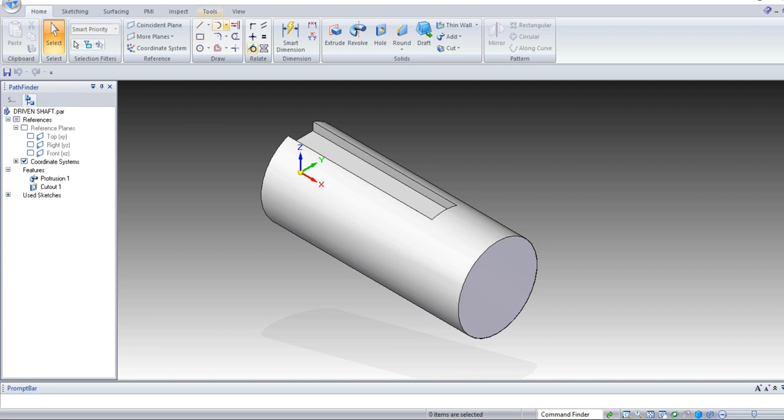Take a new file, part file, select OK, select front plane, select sketch, select front plane, take a line command.

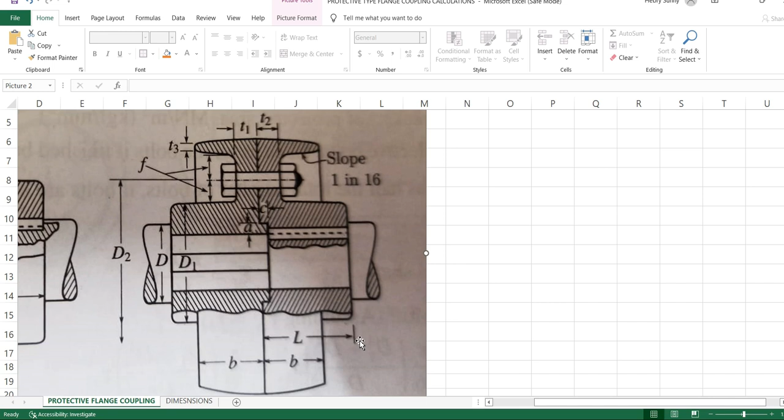From the origin point, draw a horizontal line of length equal to the length of the hub. Length of the hub is 58.4. Enter 58.4. Angle minus 180.

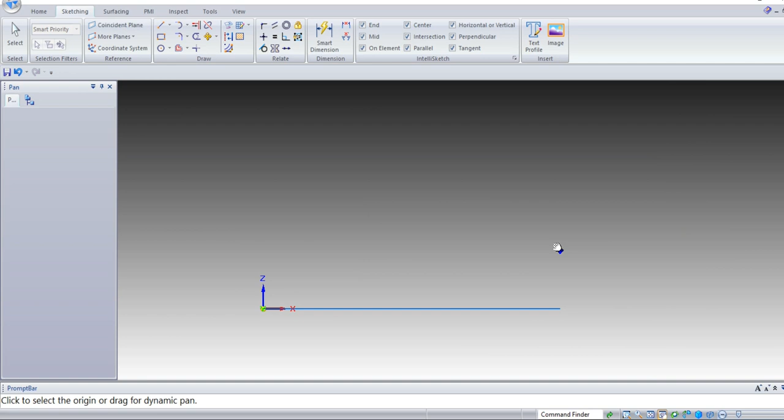Next, draw one vertical line of height d1. d1 is 64, half of which is 32 mm.

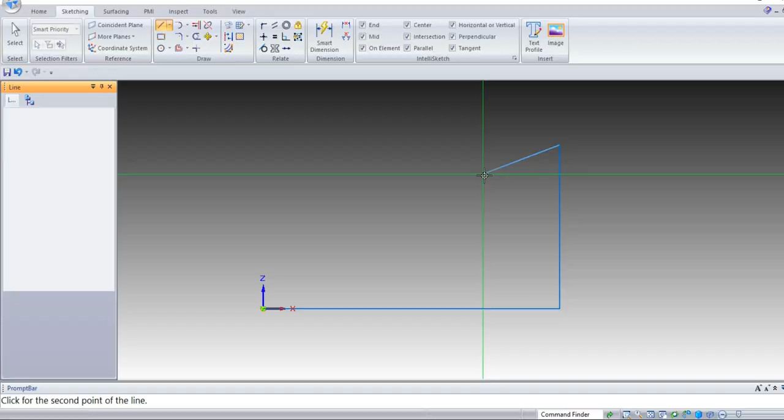Next, vertical line of 58.4 minus 20.2, that is L minus TF. Angle 0. Right click.

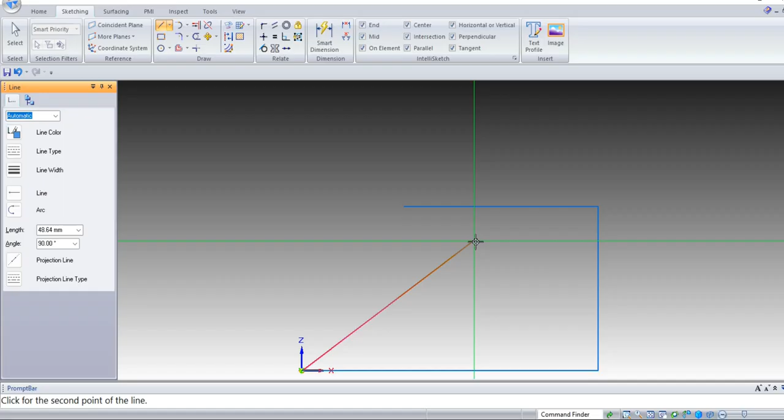Again from the origin point, draw one vertical line of height d3. Total diameter is 128, make it 128 divided by 2. Angle 90.

Next, draw one horizontal line of TF. TF is 20.2. Make it 20.2, angle 180 degrees. Enter. Next, again draw one horizontal line of TP. TP is 8 mm. Enter 8 mm, and again angle 180 degrees.

Draw one vertical line of T3. T3 is 3.2 mm, minus 90 degrees. End the command, right click. Draw one reference line from the origin point.

Vertical line of bolt diameter D2 is 96, so 96 divided by 2 is 48. Horizontal line up to this dotted line. Here you will find the reference dotted line.

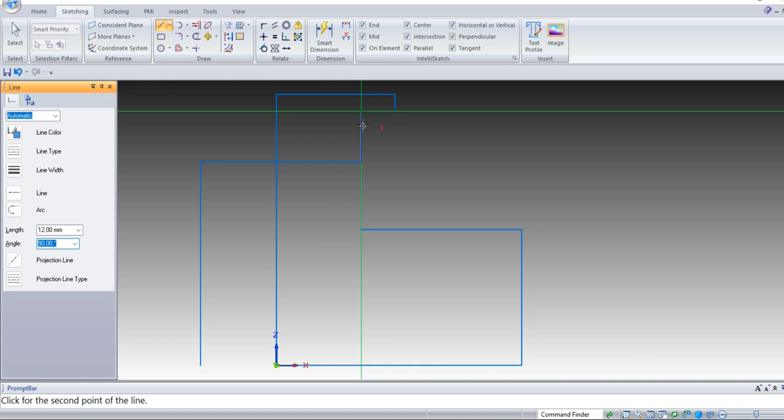Click here, draw vertical line upward. f is 24, exactly half of f is 24 divided by 2, angle 90. Join this line to this 3.2 mm line.

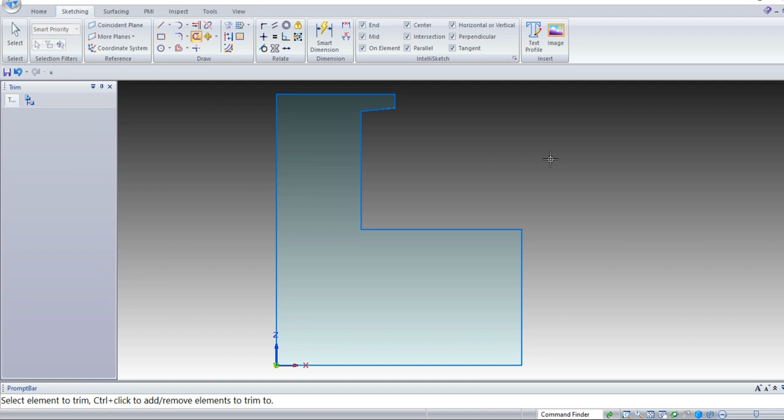Go for extend to next, click this line, extend up to here. Take a trim command, trim this line and this line. Select Control I for isometric view.

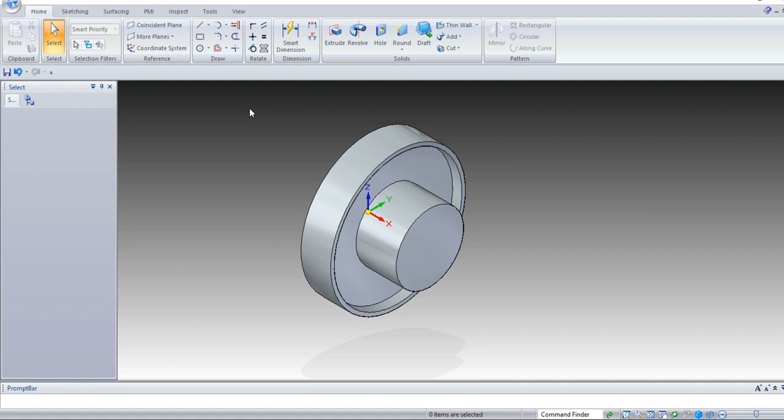Go for revolve command. Click on the sketch, accept. Select this bottom line. Revolve 360 degrees.

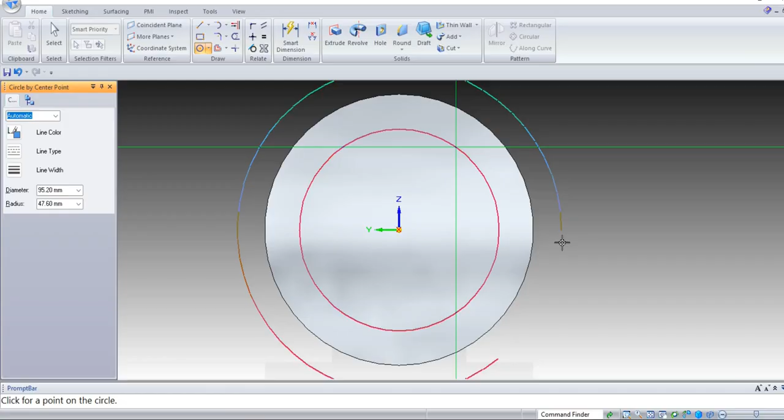Now select this face, left face, take circle, select left face, Control L. From this origin point, draw a circle of diameter - bolt diameter is 96, diameter of the bolt circle is D2. Enter 96. Escape. Again repeat the circle command.

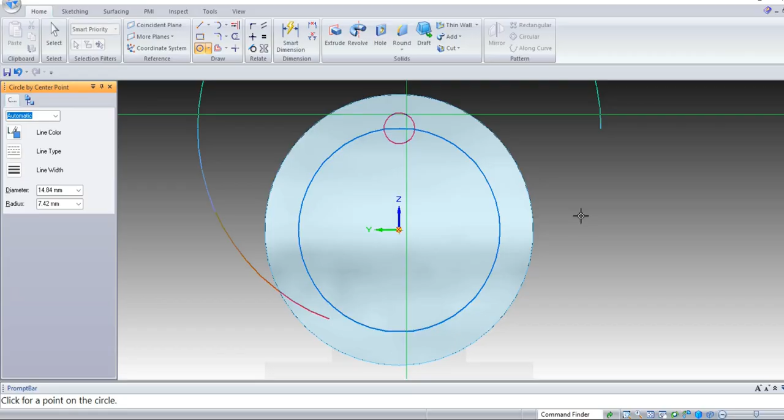From exactly this point, draw one circle of dB, that is 12 mm. Enter 12. Repeat for 4 circles because number of bolts is 4, placed exactly 90 degrees apart. Right click, now escape.

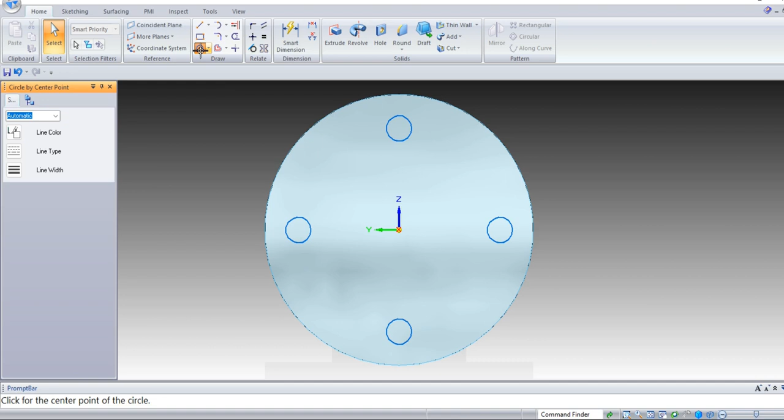Select this circle of 96 mm, which we took for reference purpose, so delete this line. Again select circle, from origin point draw one circle of 32 mm, diameter of the shaft. Enter 32.

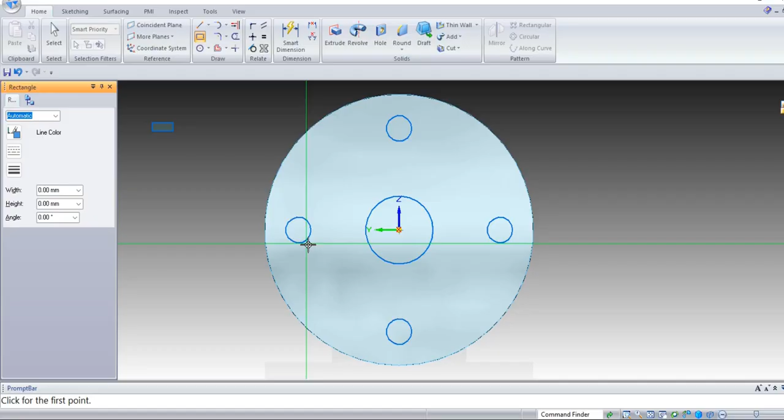Now select rectangle, draw one rectangle of width 10, height 4, angle 0. Here we see width 10, height is 8, half of the height is 4 mm, so we take 4, and length is 10.

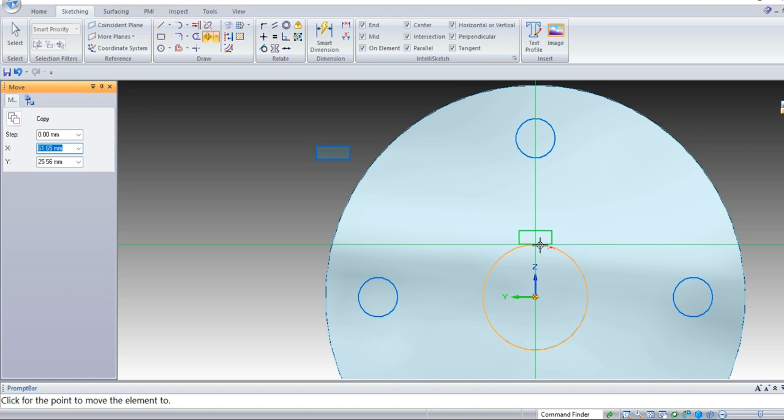Select move command, select the rectangle, place it exactly in the middle of the top line, pick it, and place exactly at the bottom - select this bottom line on the center point, place it on the 32 mm diameter circle.

Now go for extend to next, extend this line up to this circle. Select trim, trim this line.

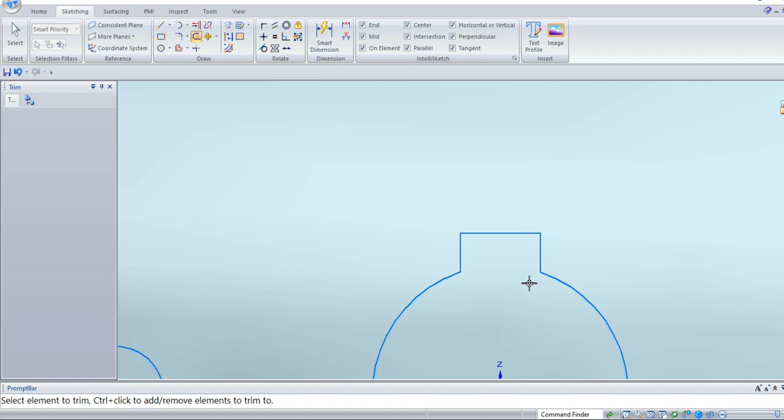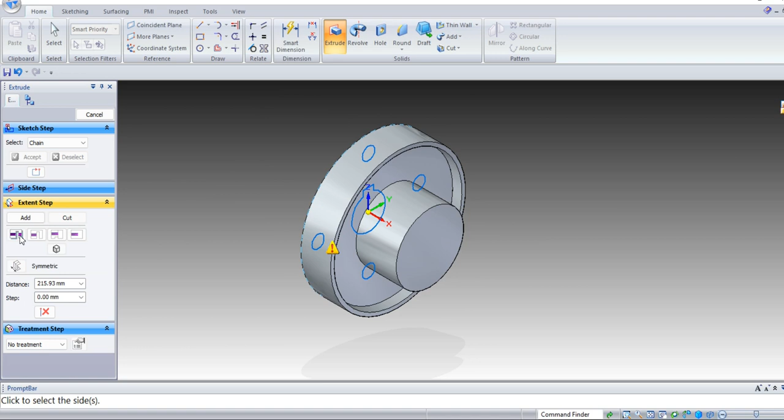Now select isometric view, cut out, select the sketch, select all 5 sketches, accept. Make it through all, move the direction towards the left side and click. This completes the driven flange.

File, save, driven flange.

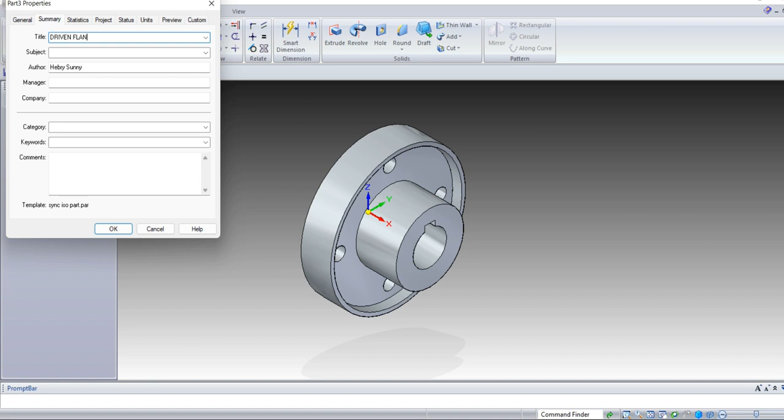Select OK. Here also give the file name as driven flange. Select OK, save. Now select again new file, part file. Select OK. Now let us design the same part as a driver shaft.

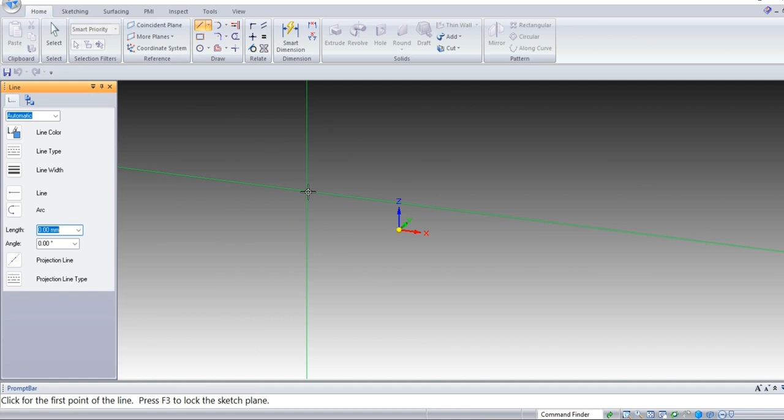Select line command, select front plane from origin point. Now I will take it towards the left. Length is 58.4, angle minus 180.

Select fit command. Height of the hub, that is 64 divided by 2, that is 32 mm.

Horizontal line, L minus TF, that is 58.4 minus 20.2. Right click, end the line command.

Again from this origin point, draw one vertical line of length 128 divided by 2, that is 64 mm. One horizontal line of 20.2, TF is 20.2, 180 degrees.

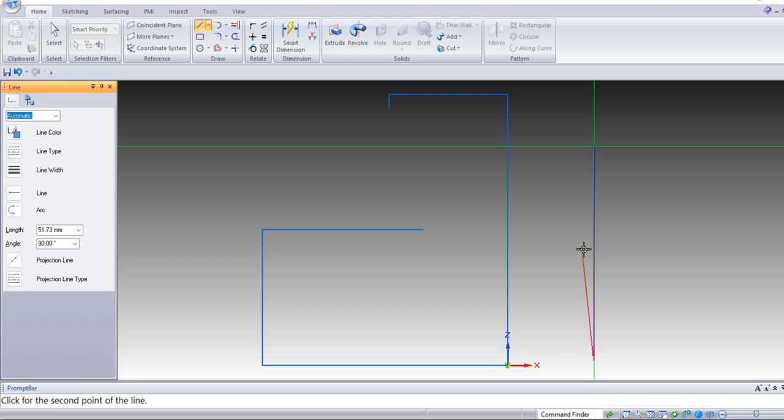Now from this origin point baseline, draw a reference line of 96 divided by 2, that is diameter of the hole circle. Horizontal line up to this dotted line, towards upward.

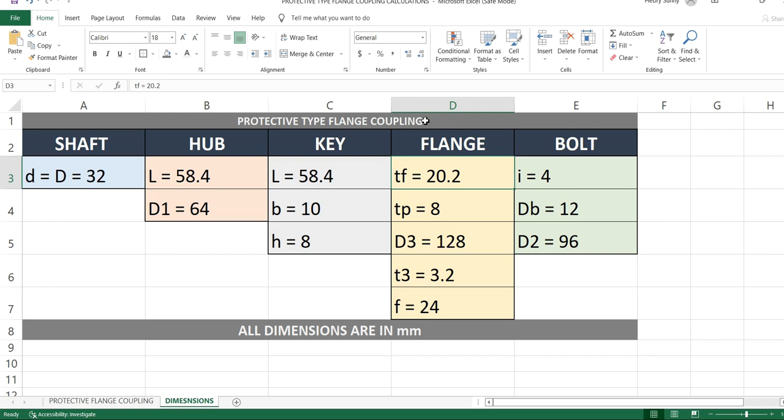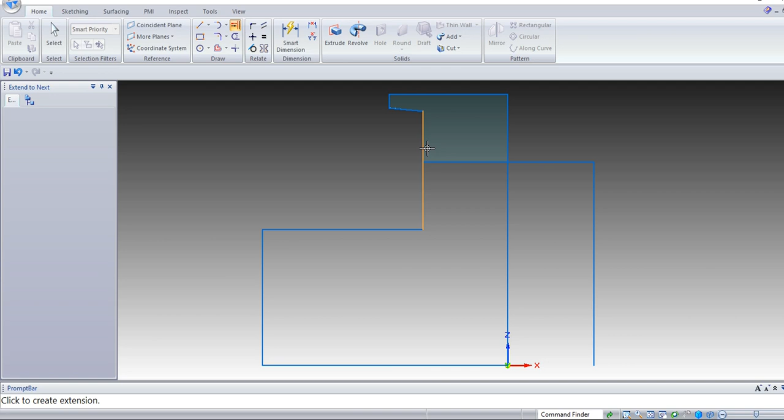Vertical line, take it as 24 divided by 2, half of 24, that is F, and join to this line. Now select extend to next, select the vertical line. Now go for trim command, trim this line.

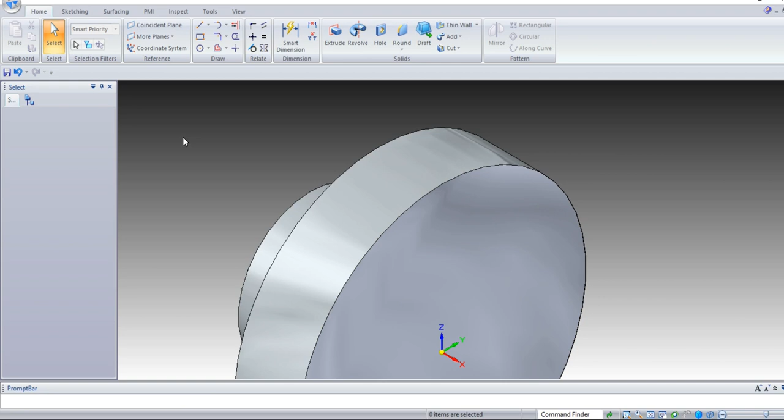Now select isometric view, select revolve, select the sketch, accept, select the baseline, select OK. Select right view, just to see one more time.

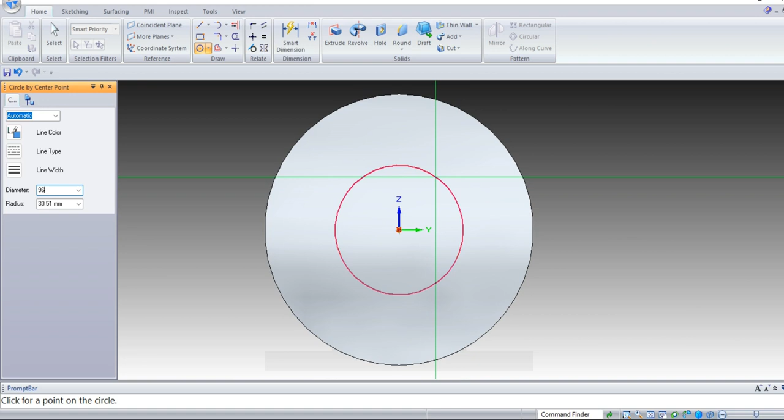Draw this 96 mm circle, followed by 12 mm, enter 12.

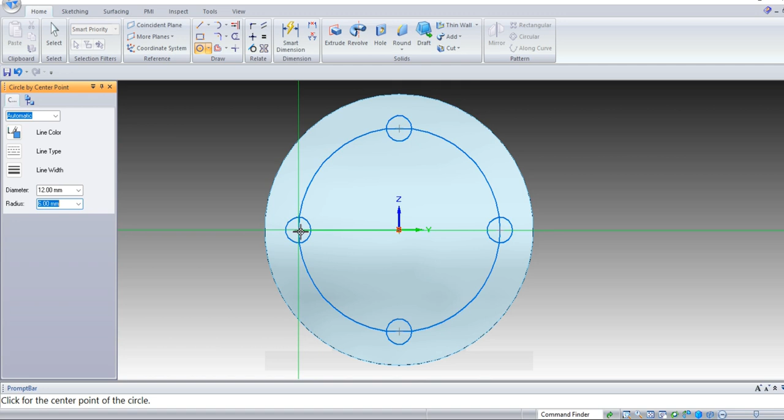Only one small change I will explain you. Delete this circle as usual. From origin point, draw one circle of 32 mm. Till here the procedure remains the same.

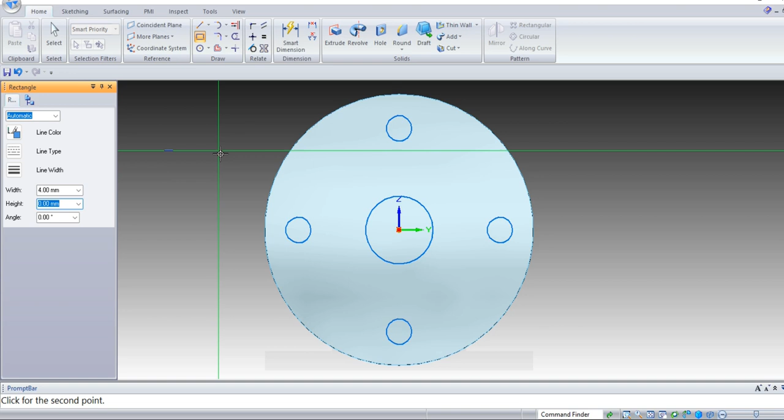Here, width take it as 4 mm, height as 10 mm, angle 0.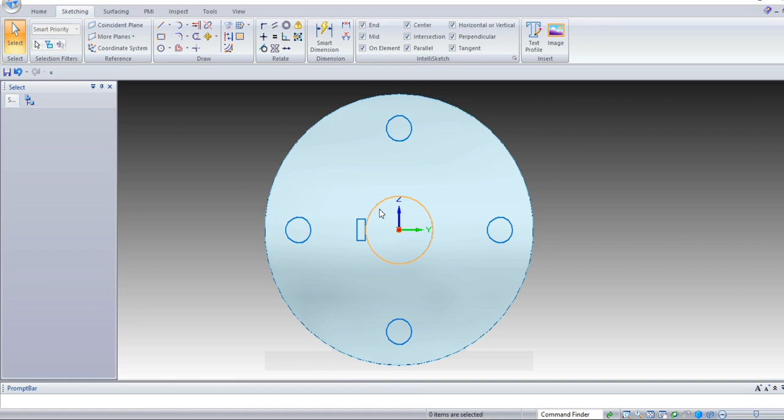Now select this rectangle, then move command, select and place it here. Now extend to next, extend this line, trim this extra portion.

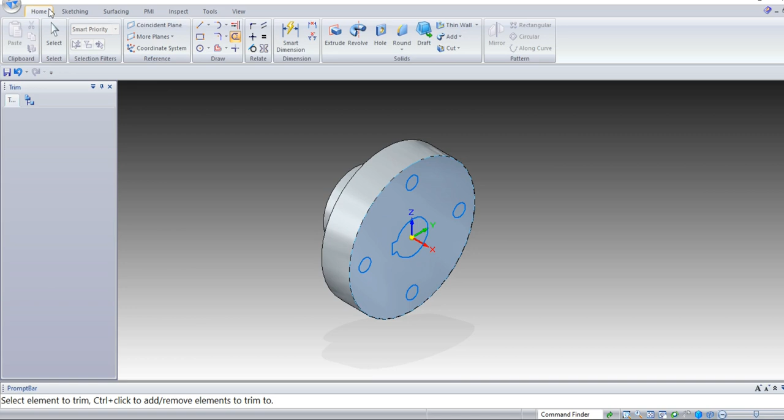Now select isometric view, extrude, cut, select all 5 sketches, accept, select through all towards the left side. So this completes the driver flange.

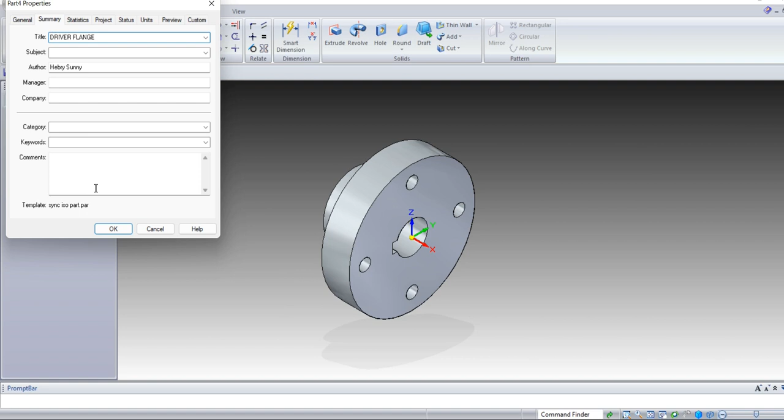Driver flange. Save.